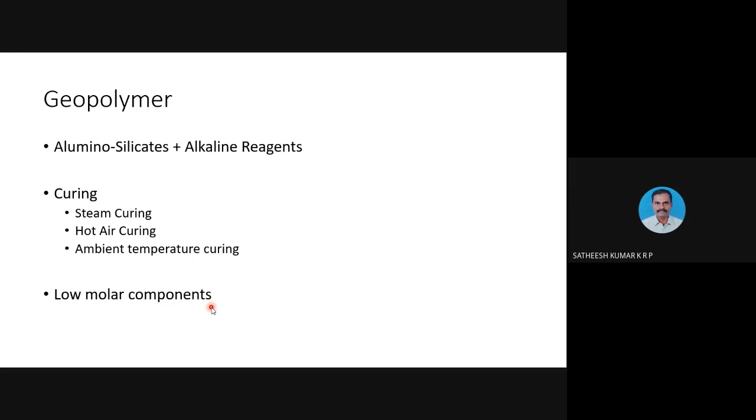From this slide onward, I will try to explain the experimental study which we conducted in our institute. We were trying to explore the use of fly ash with GGBS. We used a small percentage, around 10% fly ash with the GGBS. The solutions we used are sodium hydroxide or potassium hydroxide, as well as sodium silicate or potassium silicate. We were not going for calcium hydroxide and calcium silicate solutions. That is also possible, but the reaction takes place very fast and leaves residues. The intended product won't be obtainable with calcium compounds.

The fine aggregate and coarse aggregate which we used were of normal standards, and we were trying different molarities, either of potassium hydroxide or sodium hydroxide, as well as potassium silicate and sodium silicate. We were doing experiments with 6 molar up to 14 molar solutions. We obtained the potassium hydroxide in the form of pellets and the silicates in powder form.

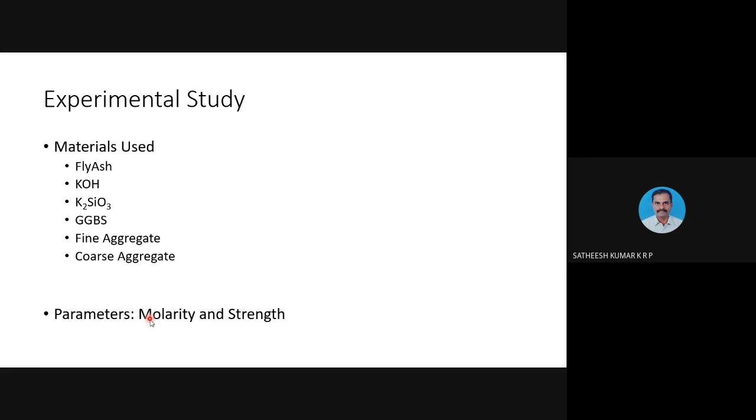So the experimental studies which we were able to complete are the cube compressive strength, split tensile strength, flexural strength of prisms, as well as we were able to test some specimens of beams. The cube compressive strength was done for all the 4 combinations of the alkaline solutions: sodium hydroxide with sodium silicate, sodium hydroxide with potassium silicate, potassium hydroxide with sodium silicate and potassium hydroxide with potassium silicate. All the 4 combinations with different molarities, from 6 molar until 14 molar solution.

And in all these studies, we observed that for the cube compressive, here I will also explain the method which we used to arrive at the composition. We used Hardjito and Rangan's recommendation, which was given in 2005. From the density of the concrete, we arrived at the volume of aggregate. From the volume of aggregates, we got the volume of the rest of the components. And the ratio between the hydroxide solution and the silicate solution, we kept as 1.5.

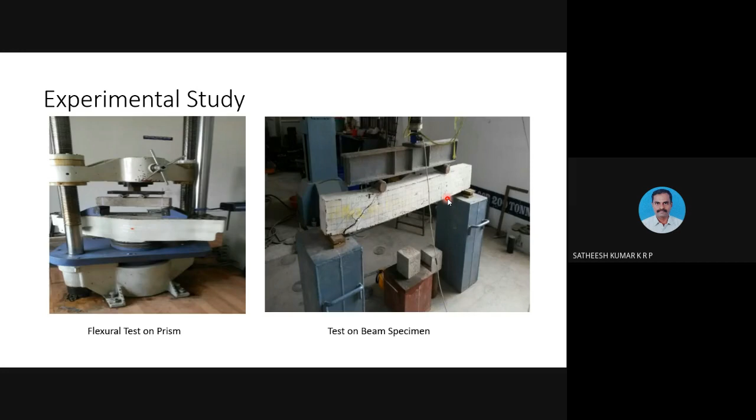And with respect to the durability test, we were actually planning to do the durability test, but due to this lockdown, we were not able to continue with this. And this behavior of beam, we were able to record the behavior of beam until the failure. And we observed that for high molar mixes, the beam actually exhibited ductility. In the sense, we observed more deflection before failure.

Even though there is not a significant increase in the strength, like the cube compressive strength and the split tensile strength of the high molar solutions in this study, we can say like a 10 molar solution, 12 molar solution, 14 molar solution, those had a very close range. Even though the strength characteristics are much closer to each other, the deflection behavior was found a little different.

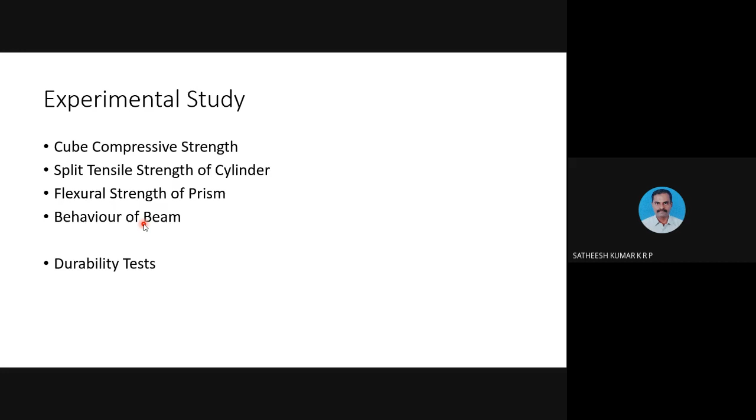And some of the inferences from this study are, the low molar mix showed less workability. Like for the slump test, we were able to get only 5 slump for the first two low molar mixes, namely the 6 molar solutions and 8 molar solutions. Whereas the workability was relatively high. We were able to get around 20 slump for the other mixes.

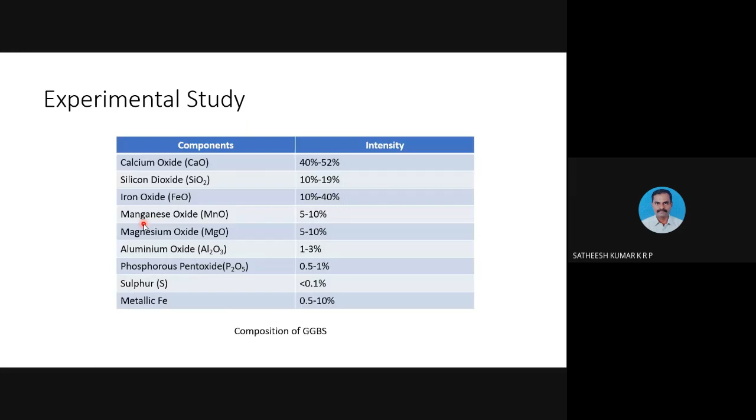The slump value is also very low because we used more amount of coarse aggregates. I have not given the mix here. As I said, we are using the mix like we can say the fly ash to fine aggregate to coarse aggregate is 1:1.75:4. So the very high value of the coarse aggregates might be the reason for the low slump values.

And as I said, we have observed a threshold or an upper limit in the case of the compressive strength with respect to the molarity. We were able to achieve good results for the compressive strengths only at high molar solutions, in the sense for 10, 12, and 14 molar solutions. But the result was nowhere near for the low molar solutions like 6 molar and 8 molar solutions.

And as I have mentioned earlier, the tensile strength of the geopolymer concrete is found to be much less than that of the conventional concrete. We were trying to attain 20 megapascal as the compressive strength, but the split tensile strength was only around 1.8 megapascals.

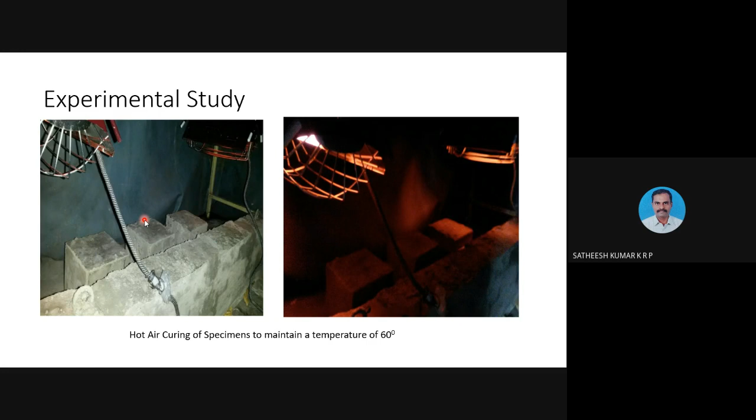And with respect to the high molar mix, these mixes exhibited more deflection in the case of beams. So from this, we are trying to get the ductility of the material, because with high molar solution, only the alkaline component is changing. We are not actually changing the fly ash ingredient. Only by increasing the alkaline reagents, the behavior of the material is found to be towards ductility rather than brittle material.

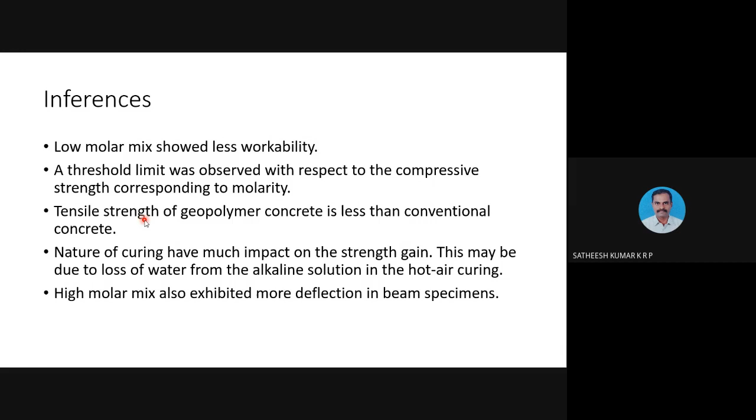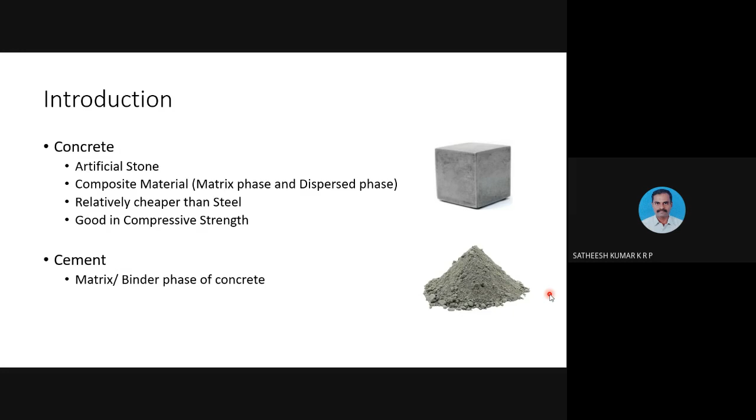I'm ready to interact on anything about composite materials and about geopolymer concrete. We were also discussing the case of egg and honey, which was used for concrete. We can also discuss those things. If someone is interested, I can also discuss the other project in which we were using egg and honey for the preparation of a binder material.

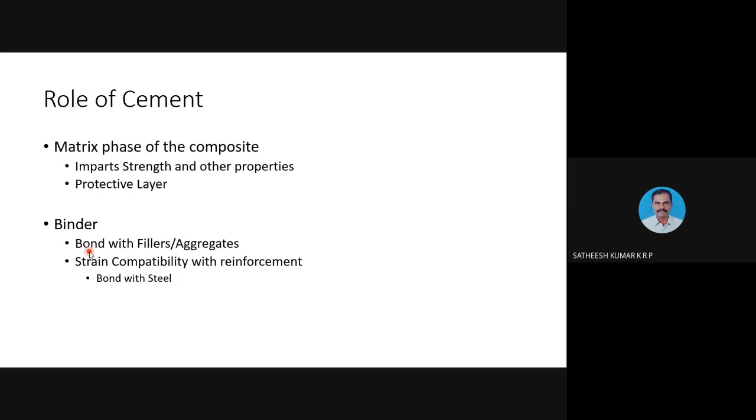So actually the chemical process which is involved in a cement is much more complicated. That is actually reduced in the other binding materials. Like in the case of this fly ash, lime, and gypsum, we are using only two ingredients, namely the fly ash and the lime. We all might know that these components are responsible for the initial setting time, final setting time, and so on. One is responsible for quick setting, but all these can be simplified in a very simple way from the classical methods.

Can we replace fly ash from cement concrete instead of cement? Yes, sir. That is also possible, sir. Like in geopolymers, we are actually replacing the binding material. The matrix phase alone is changed, whereas the dispersed phase remains the same. We are using the same fine aggregate and coarse aggregates, but the only thing we are replacing is the matrix phase, which is from the cement.

We all know the difference between ordinary Portland cement and PPC, where we use high volumes of class F fly ash. Even after adding a huge volume of fly ash, we are still replacing cement with some volumes of class F fly ash.

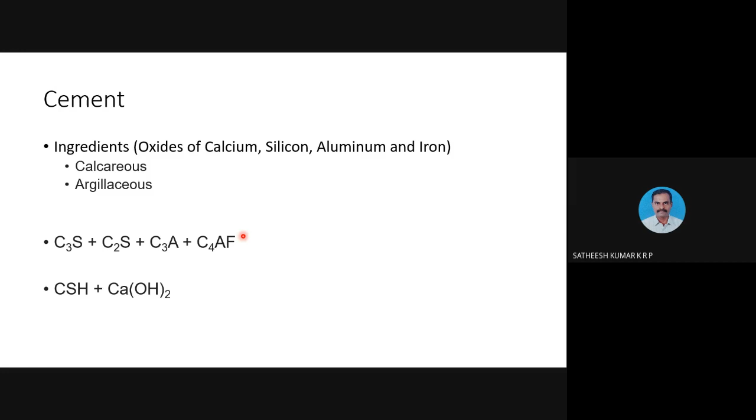Sir, like the fly ash bricks as mentioned in these Fal-G bricks, here we are using only fly ash with lime, where no cement is involved. If cement is involved, then the chemical reaction itself is different. In fly ash we have silicates, and in lime we have calcium. These two will react to form the calcium silicate components. Whereas in cement we have the Bogue's compounds, and a separate reaction will keep on going. And the excess lime from the hydration of the cement will also be consumed in this reaction.

But what happens when we combine this fly ash, lime, gypsum with cement is that gypsum acts as an accelerator for one component, whereas it acts like a retarder for the other component. But the ultimate product is only going to be the calcium silicate component. If you are using these two things together, it's like using two compatible binders in a single matrix, which will give the same ultimate product.

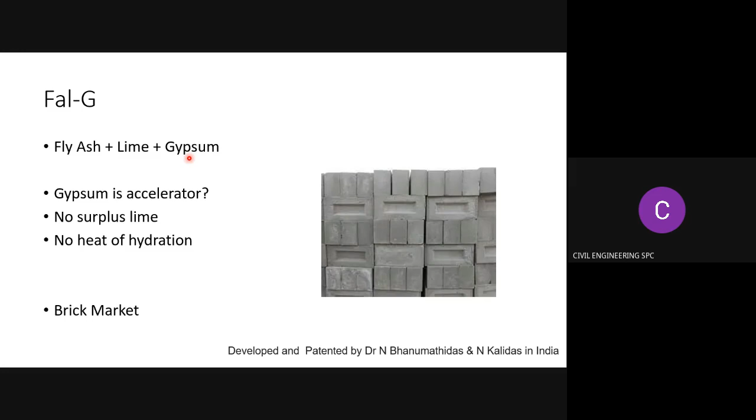Thank you, Professor Satheesh Kumar, sir, for your valuable lecture on cementless concrete. This is the last session of this national level FDP program. The professor has covered a topic on cementless concrete, and subtopics like the fundamental ingredients of concrete, the nature of concrete and its ingredients, the role of cement in concrete, the ingredients of cement, and what other binding materials can be used instead of cement for getting a good concrete.

And also he has discussed about fly ash bricks. It is the latest building material instead of earthen bricks. Nowadays it is widely used in construction activities because of scarcity of earth. The earth source is limited, and availability of good soil is very limited. So especially in Tamil Nadu, the construction industry has totally moved towards fly ash bricks. We are having a lot of thermal power plants in Tamil Nadu and throughout the nation, so huge quantities of fly ash are coming out of them, and it is used in cement industries and also for manufacturing fly ash bricks.